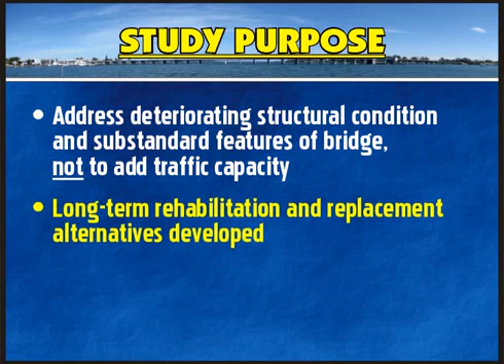The purpose of the study is to address the deteriorating structural condition and substandard features of the bridge, not to add traffic capacity. The FDOT has developed long-term bridge rehabilitation and replacement alternatives. The no-build or repair alternative is also considered viable throughout this study.

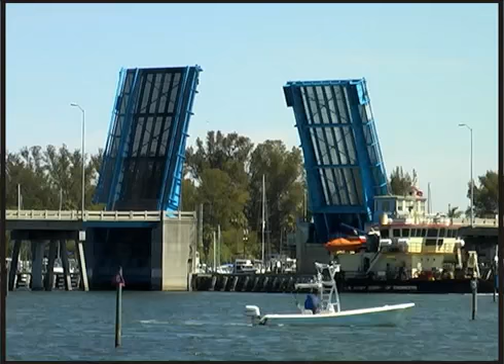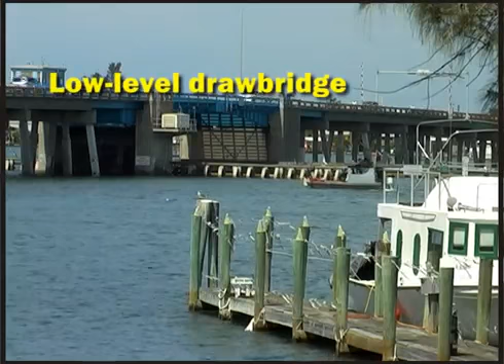This PD&E study began in January 2013 and is scheduled for completion in summer 2015. It will conclude with a determination of whether the bridge is repaired, rehabilitated, or replaced. If the replacement alternative is selected, the type of bridge will be identified. An analysis of various two-lane replacement alternatives continues. FDOT is studying low-level drawbridge, mid-level drawbridge, and high-level fixed bridge designs. We also considered a tunnel alternative.

The FDOT is currently doing a short-term repair project which began in May 2014 to keep Cortez Bridge safe and operable for up to 10 years, or until 2025. Please speak with an FDOT representative for more information about the repair project. Now, let's describe the alternatives under consideration.

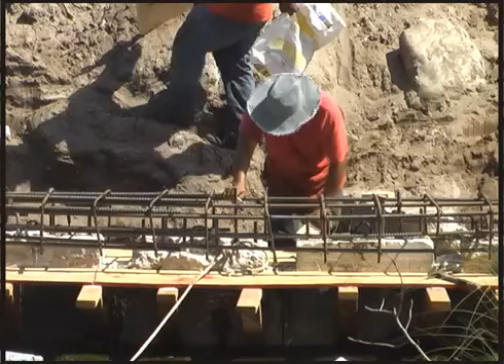First, the no-build or repair alternative. While no one can precisely predict how long repairs will last, the no-build repair alternative includes continued repairs and routine maintenance of Cortez Bridge to keep it safe and operable for up to an additional 10 years following the current 10-year repair project, or until 2035. After the 10-year repair, the bridge would need to be replaced.

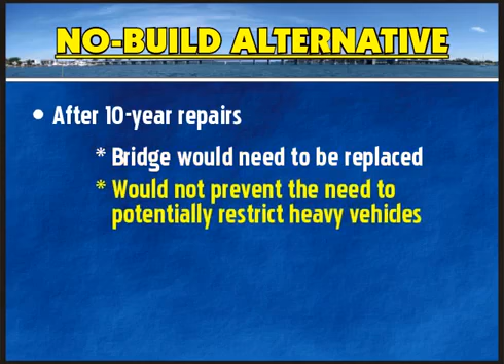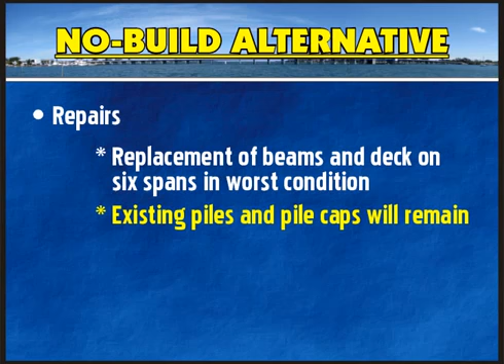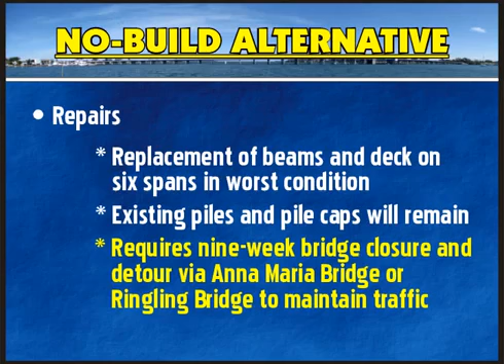The no-build repair alternative would not prevent the need to potentially restrict heavy vehicles, meaning that heavy trucks such as commercial delivery or moving trucks could be restricted. Repairs include replacement of the beams and deck on the 6 spans in the worst condition to address beam deficiencies. The existing piles and pile caps will remain. The no-build repair project would require closure of the bridge for 9 weeks and a detour via Anna Maria Bridge or Ringling Bridge to maintain traffic during construction.

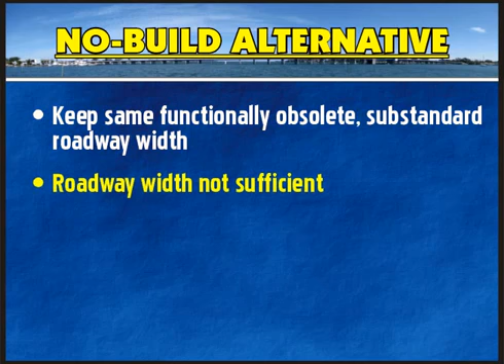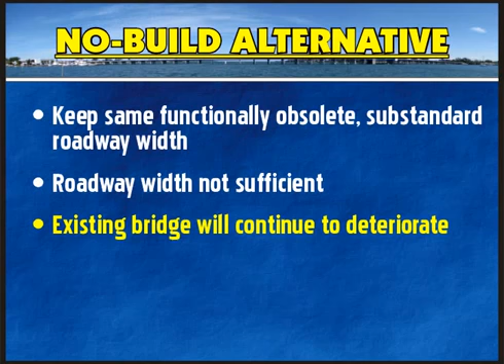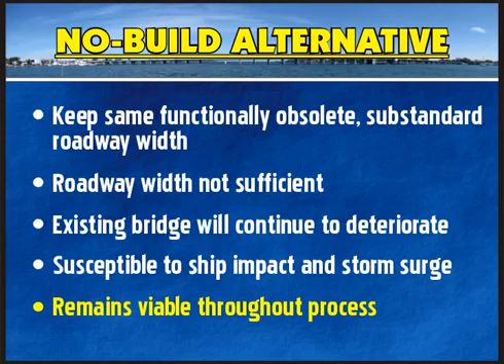The no-build repair alternative will keep the same functionally obsolete substandard roadway width. The roadway width is not sufficient to provide any shoulders, and the brush curbs do not meet current safety standards. Despite repairs, the existing bridge would continue to deteriorate. Furthermore, the bridge would remain susceptible to damage from ship impact and storm surge due to its substandard foundations and low profile, respectively. The no-build repair alternative will remain viable throughout the analysis and evaluation process.

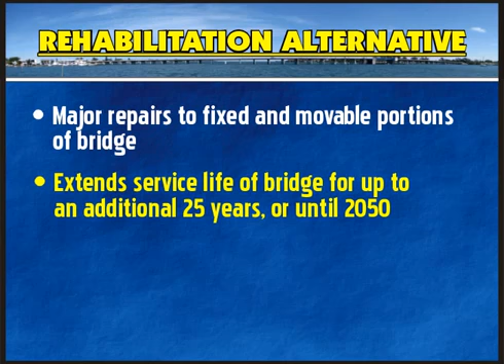Next is the rehabilitation alternative. The rehabilitation alternative includes performing major repairs to the fixed and movable portions of the bridge. While no one can precisely predict how long these repairs will last, the rehabilitation alternative is intended to extend the service life of the bridge for up to an additional 25 years following the current 10-year repair project, or until 2050. After the 25-year rehabilitation life, the bridge will need to be replaced.

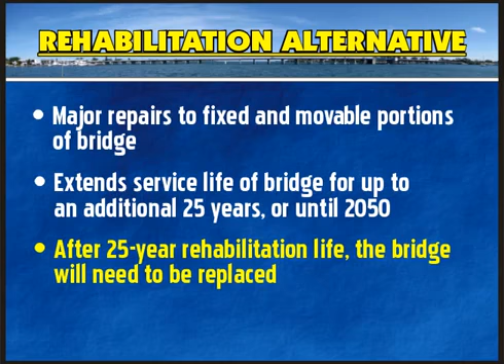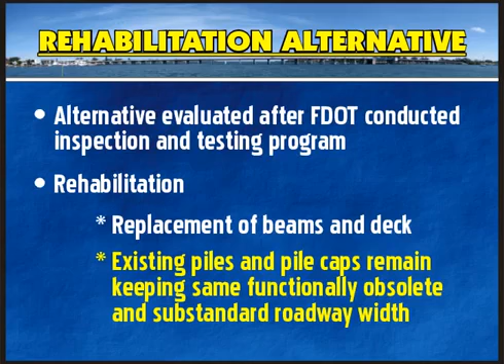The rehabilitation alternative was evaluated after FDOT conducted an extensive inspection and testing program. Rehabilitation includes the complete replacement of all the beams and deck to address their condition and improve their reliability. The existing piles and pile caps will remain. However, the rehabilitation alternative would keep the same functionally obsolete substandard roadway width. The original piles and foundation would remain and would continue to be affected by the extremely corrosive saltwater environment. Additional repairs would be required periodically on the piles and other structural components to maintain structural adequacy.

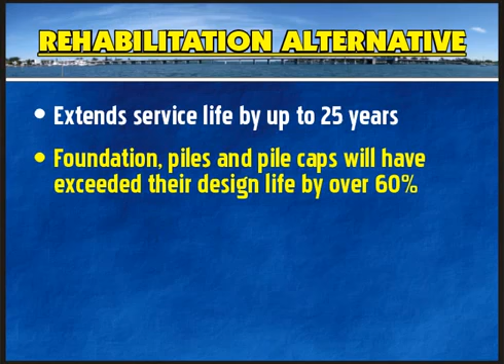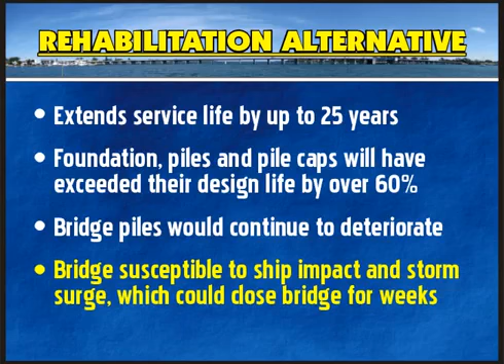While the rehabilitation alternative would extend the service life of the bridge by up to 25 years, the foundation, piles, and pile caps will have exceeded their design life by over 60% in those 25 years. The bridge piles would continue to deteriorate, and the bridge would continue to be susceptible to damage from ship impact and storm surge, damage that, if severe, could close the bridge for several weeks.

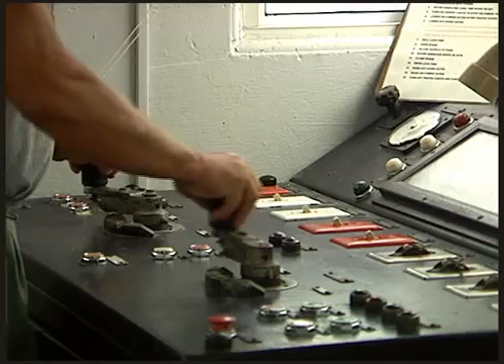The rehabilitation alternative will keep the same functionally obsolete substandard roadway width and brush curbs, since widening to accommodate additional shoulder areas is not viable due to the existing structural capacity and the capacity of the electrical and mechanical systems of the movable span. A temporary bridge is required to maintain traffic during construction, but the potential to restrict heavy vehicles would be avoided. The temporary bridge will also result in additional temporary construction and environmental impacts.

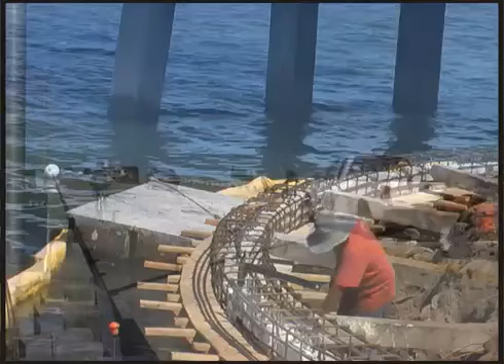The replacement alternatives provide a long-term solution with a 75-year life following the current 10-year repair project, or until 2100. Only a 2-lane bridge is studied because State Road 684, within the study limits, is classified as a constrained roadway by the Sarasota-Manatee Metropolitan Planning Organization. This means there are no long-term plans to widen Cortez Road within the study limits.

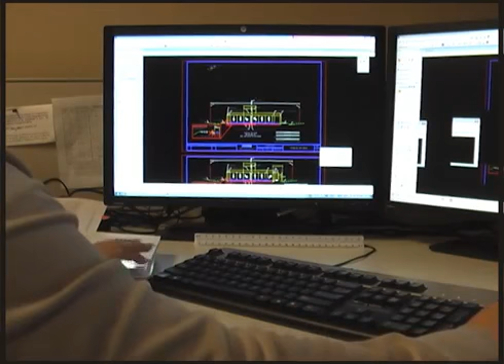FDOT developed a modern, typical cross-section for the replacement alternatives. It includes 2 12-foot lanes and 2 10-foot shoulders, which can accommodate bicyclists and disabled vehicles, providing more reliable and safer operations, including during an evacuation.

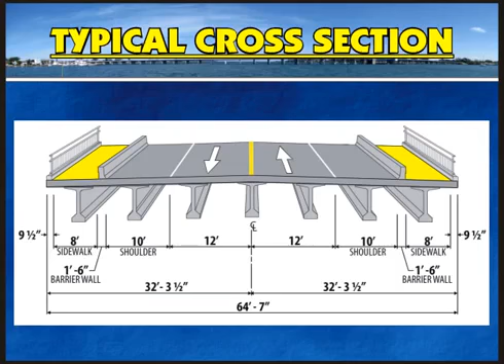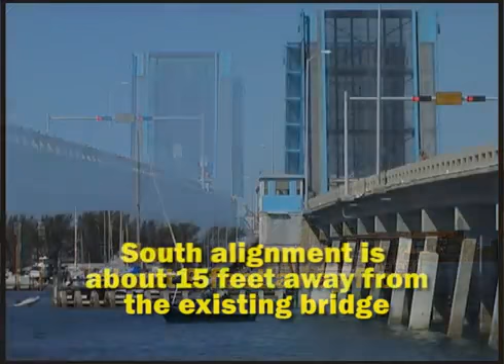8-foot sidewalks are on both sides. Next, the study analyzed new bridge alignments within the existing corridor. They are a center alignment, a north alignment, and a south alignment. The north alignment is about 9 feet away from the existing bridge, and the south alignment is about 15 feet away from the existing bridge.

The project length is not significantly different for the alignments, therefore construction costs are not significantly different between the north and south alignments. The center alignment has been dropped from further consideration because it requires a long detour or a $14.9 million temporary bridge. The existing vertical clearance of Cortez Bridge at the Intracoastal Waterway is 17.5 feet.

U.S. Coast Guard establishes guide clearances at this location. They are a minimum 21-foot vertical navigational clearance for a new drawbridge and a minimum 65-foot vertical navigational clearance for a new fixed bridge. The horizontal guide clearance for all bridge replacements is 90 feet perpendicular between fenders.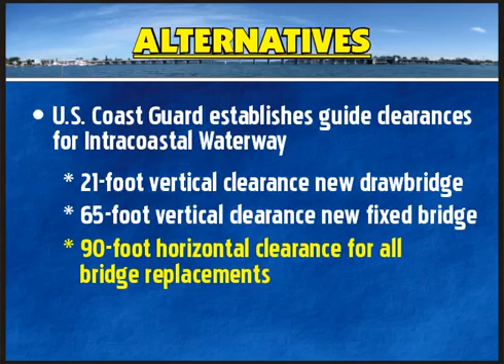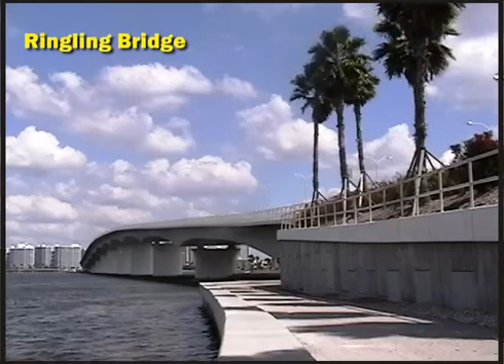However, we are considering a 100-foot channel, which is 10 feet greater than the existing horizontal clearance, to match the clearances at Ringling Bridge and the proposed Anna Maria Bridge. The wider channel will be safer and allow vessels to pass through the channel faster.

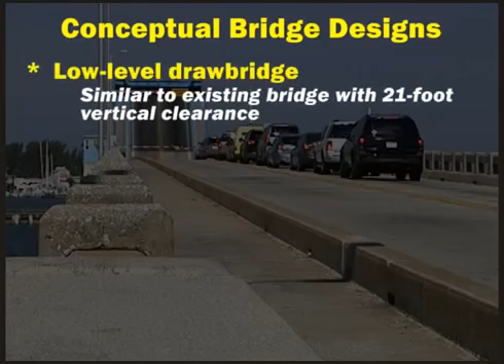FDOT has developed the following conceptual bridge designs. A low-level drawbridge, similar to the existing bridge, with a 21-foot vertical clearance when the bridge is closed. A mid-level drawbridge, with a 45-foot vertical clearance when the bridge is closed. The higher clearance allows about 50% of the boats that currently require the bridge to open to pass underneath without opening the bridge, potentially cutting the number of openings by half and reducing delays for vehicles and vessels.

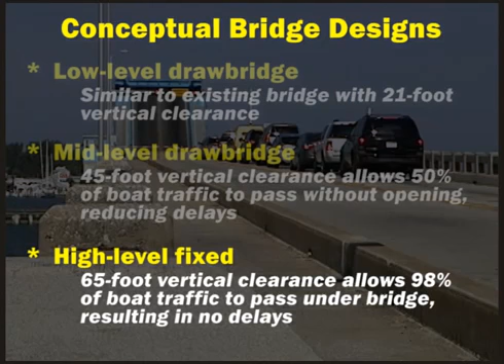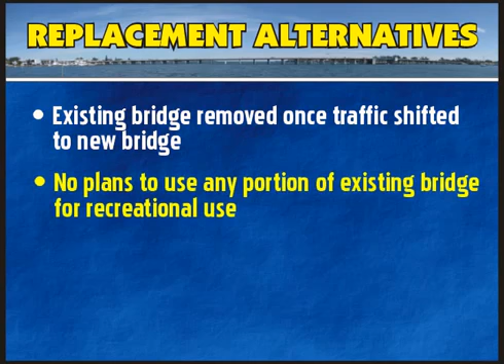And a high-level fixed structure with a 65-foot vertical clearance allows 98% of all vessels that currently use the channel to pass under the bridge, resulting in no delays. All bridge replacement alternatives include removal of the existing bridge once traffic has been shifted to a new bridge. If the replacement option is selected, there are currently no plans to leave any portion of the existing bridge for recreational use. The combination of 2 alignments and 3 bridge replacement heights results in 6 bridge replacement alternatives.

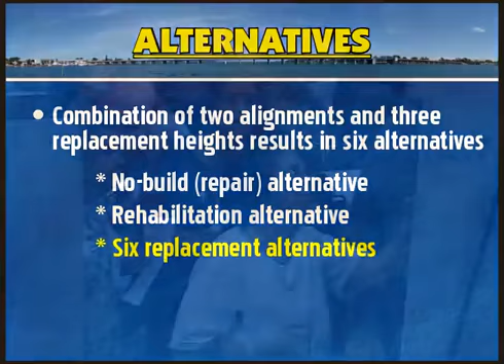In order to quantify the costs and potential impacts associated with the alternatives, FDOT analyzed the no-build repair alternative, the rehabilitation alternative, and the 6 replacement alternatives. The results are included on the Alternatives Analysis Matrix poster board and in your project handout. Aerial photographs with the alternatives are displayed for your review. Representations of the bridge heights are also displayed.

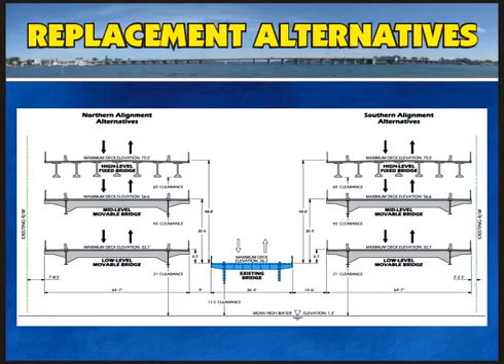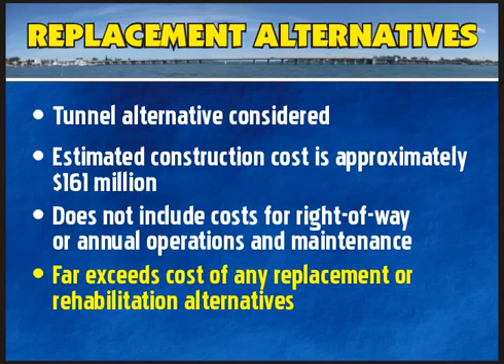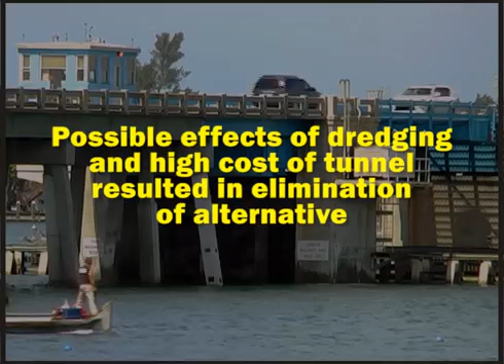FDOT considered a tunnel alternative. The estimated construction cost for a tunnel is approximately $161 million, not including additional costs for right-of-way or annual operations and maintenance. Based on this estimate, the tunnel alternative cost far exceeds the cost of any of the bridge replacement or rehabilitation alternatives. The study team also considered environmental effects resulting from the tunnel alternative. Possible effects to the natural environment caused by dredging, and the high cost of a tunnel, among other factors, resulted in elimination of the alternative from further consideration.

Analyses of the social, cultural, natural, and physical environments that surround the bridge are an important component of this study. Environmental effects that are studied include wetlands, seagrasses, floodplains, threatened and endangered species, water quality, hazardous materials, recreational sites, historic districts, historic structures, and archaeological sites. No significant effects are expected as a result of any of the alternatives. Effects are listed on the Alternatives Analysis Matrix display board and in your project handout.

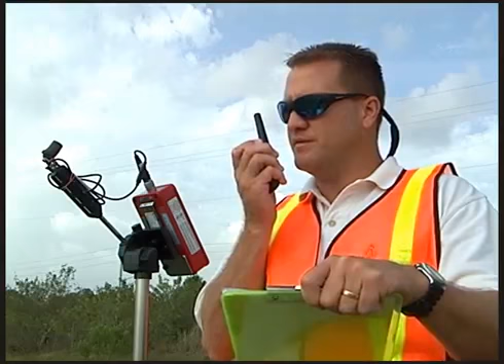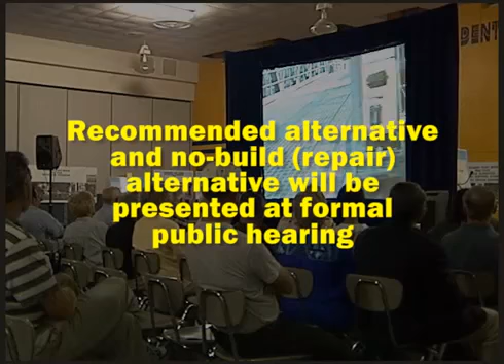The department will review comments received as a result of this alternatives public meeting and, together with the engineering and environmental analyses, refine the viable build alternatives. Then we will conduct a thorough analysis of potential environmental effects and document the findings in several reports. We also will continue coordination with local governmental entities. The recommended alternative and the no-build repair alternative will be presented at a formal public hearing where your comments will be solicited again. The hearing is tentatively scheduled for spring 2015.

Following the hearing, FDOT will submit the recommended alternative for approval to the Federal Highway Administration, the lead federal agency for this study. The engineering and environmental study of Cortez Bridge is scheduled for completion in summer 2015. The design phase for further repair, rehabilitation, or replacement of Cortez Bridge is scheduled to begin in fiscal year 2016. Right-of-way acquisition, if needed, and construction phases are not funded in FDOT's adopted 5-year work program for fiscal years 2015 through 2019. Your comments are a very important part of this study.

Before you leave this public meeting, please visit either of the 2 display areas in the room. FDOT representatives are available at each area to answer questions about the alternatives and the study. If your questions can't be answered this evening, we will respond to you when an answer is available. Please complete a comment sheet today and place it in a comment box, or take home a comment sheet, complete it, and mail it by September 8, 2014. Send your comments to Tony Sherrard, FDOT Project Manager, at the address listed at the bottom of the sheet.